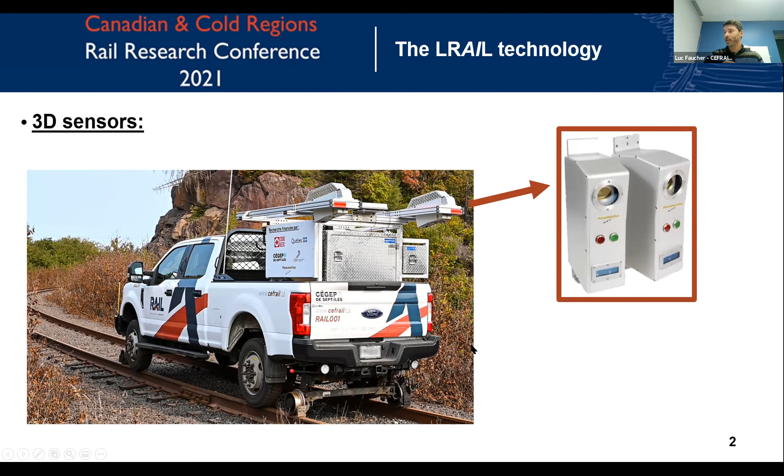They have sold this system in over 40 countries, so the big question was, can we also inspect the track with that system? So this is the system that we do own here at the college. It's mounted on a hi-rail pickup truck, but the system can also be on a car. And it is mounted here at the back with these sensors that will do 3D mapping of the track that is under it.

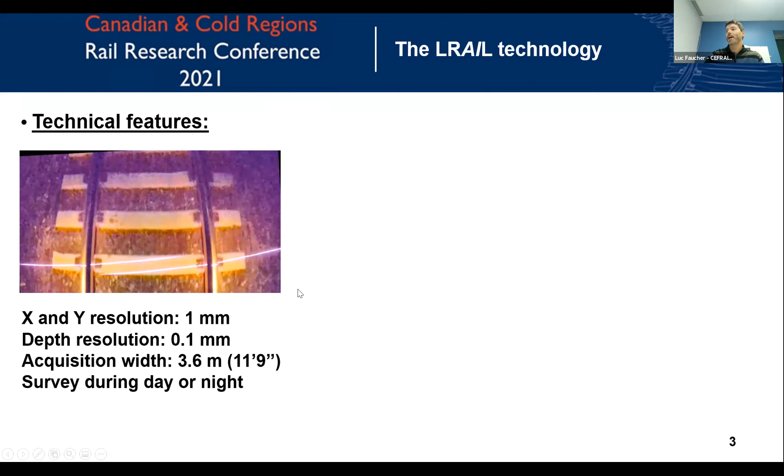So some technical features of the system: you can see here the laser lines that are sent on the ground. And you will collect this laser line with a spatial resolution of 1 millimeter and a depth resolution of 0.1 millimeter. The acquisition width is quite wide since the cameras are high. It's 3.6 meters wide, and you can do your survey during day or night. And in the end, you will get these 3D images that are here. But we mostly work with these top images in 2D, which can be represented in two different modes, which is the intensity mode and the range mode.

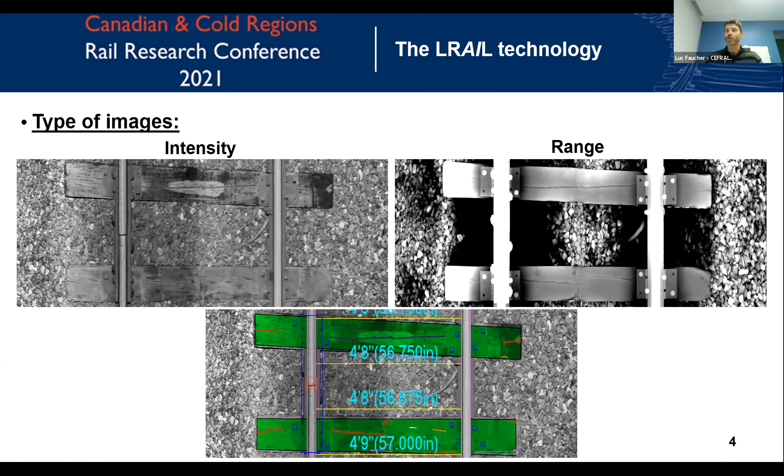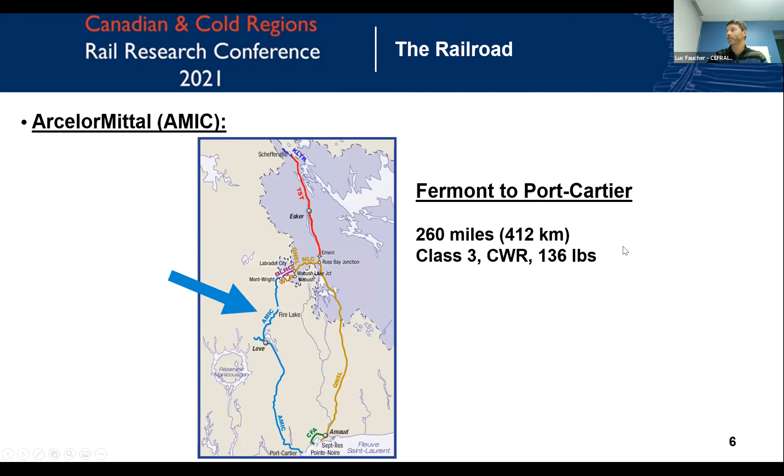It is a class 3 railroad with continuously welded rail, and it is a 136-pound grade of rail. So as I mentioned, it's mainly used to carry the iron ore from the mine at the north to the south. Every year, it's about 26 million tons of iron ore that are carried on this railroad.

And the north part here, because there are two mines, has a higher density of traffic because there is 16 million tons of run-of-mine ore that is carried at the north. So the north section is quite used during the year. It's 80 MGT per year.

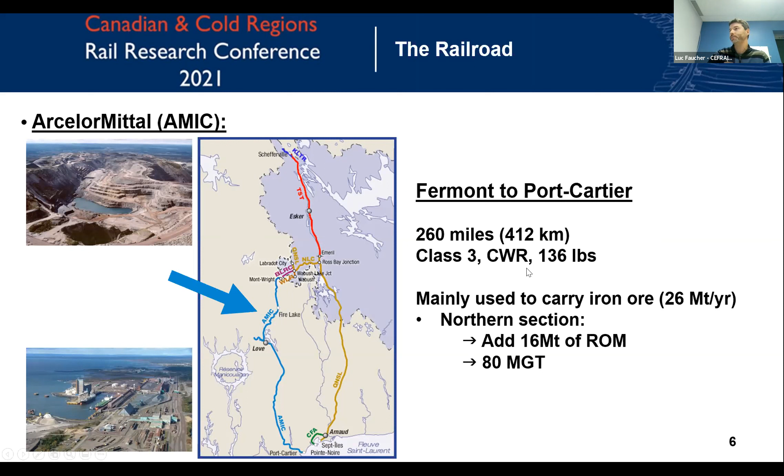So the study that we ran with the system was to assess the angle bars. The company used standard angle bars 36 inches long, fixed with 6 bolts if the joints are permanent, or only with 4 bolts if they want to weld it before winter. So we did our survey for this study during the month of July, where both types are present. And we did the inspection at inspection speed, which is 25 miles per hour.

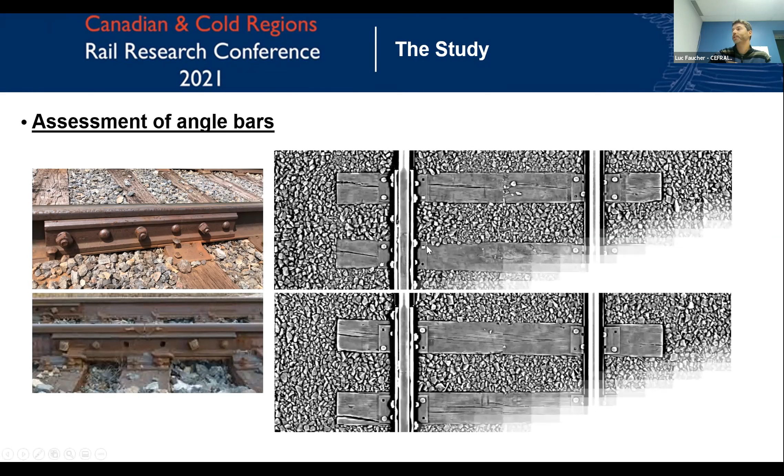And we took a survey of all the 260 miles, which in the end gives us images like these. We have 412,000 images because each section represents 1 meter. So when you go on a 260-mile-long railroad, you kind of have 412,000 images in the end.

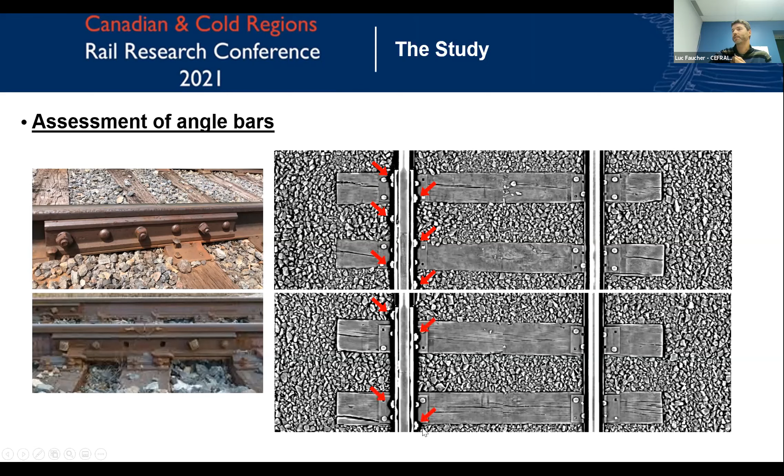And as you can see here, we can really see the angle bars and also the nuts with the bolts that are there. So for an angle bar that has 6 bolts, you can count them here. So 1, 2, 3, 4, 5, and 6. And if there are only 4 bolts, it's the same. It's quite easy to take a look at it.

So the 2 main questions during the study were: is the system capable of detecting all angle bars? And also, was the system capable of counting the right number of bolts at these angle bars? To do that, we made our own software to extract and visualize the data. And let me tell you that, because of the high definition, it's about 2.5 terabytes of data that we have to process at the end of the survey.

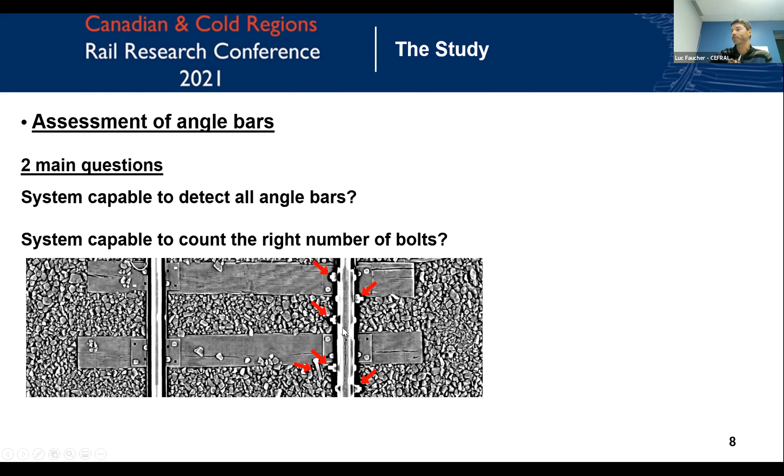So, of course, we need some help, which is AI in this case, with the deep convolutional neural network that is used. And it's quite important to assess the angle bars, since sometimes some nuts can break. As you can see here, of the 6 bolts that were there before, there's one that is missing right here. And you can see that this bolt is just next to the angle bar there. So if we have a system that is able to detect the angle bars, count the number of bolts, and also at some point the opening of the gap here, it would be great.

So to be sure that the system was capable of assessing the angle bars, we looked at 4 different key performance indicators. The first one is precision. Precision is: of all those deemed positive by the DCNN, which percentage is truly positive. So it means that when you get an image and it says there's an angle bar there, sometimes it will really have an angle bar, which is a true positive, but sometimes there won't be any angle bar, so that will be a false positive. So of all those deemed positive, what percentage is truly positive?

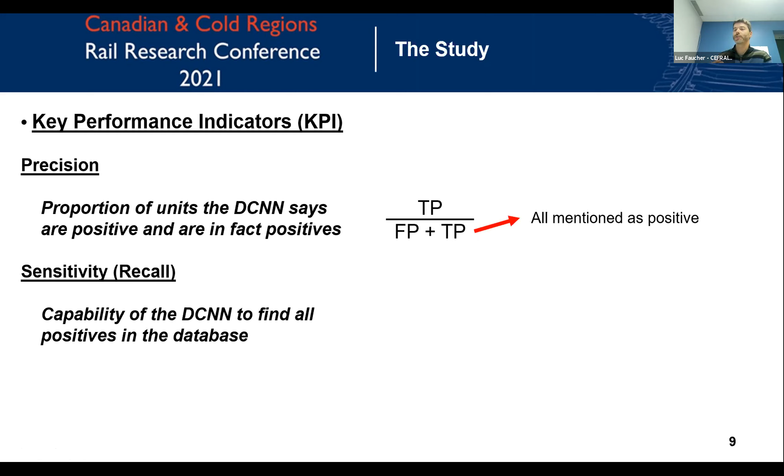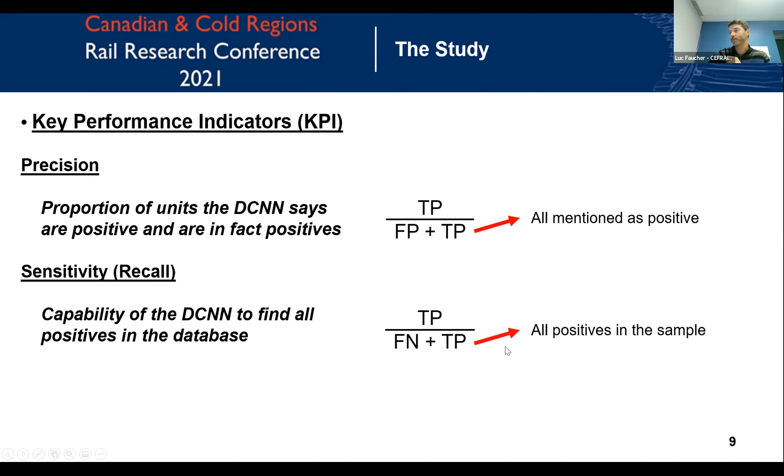We also looked at the sensitivity, or recall, which is the capability of the DCNN to find all positives in the database. To do that, you have the true positives, which are the real positives, and also false negatives, which should have been positive. So what is the proportion of true positives that we have regarding all the positives in the sample?

So the third parameter here is the specificity. Specificity is to know, of all that should be true negative, which percentage was deemed negative by the DCNN. So it's the same as we just saw before, but this time for the negatives.

So at the same time, of all the negatives in the sample, what is the proportion that are true negatives? And the fourth key parameter here is the accuracy. So the ratio of correctly labeled subjects to the whole pool of subjects. So of all that says that were positive or negative and that in fact were true, what is the proportion over the whole pool of subjects?

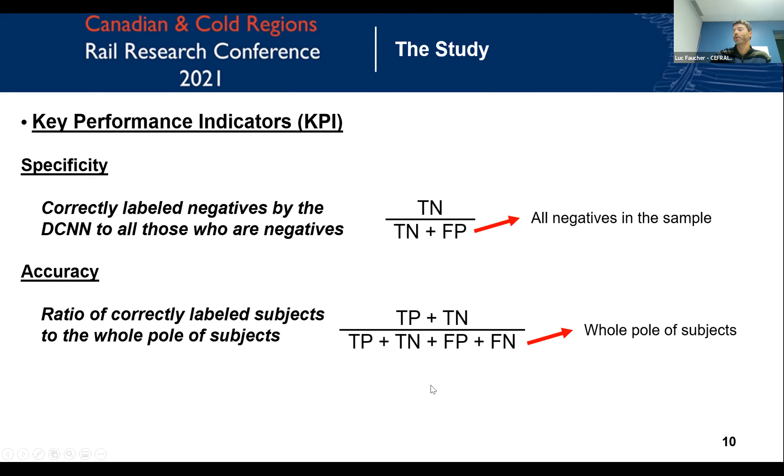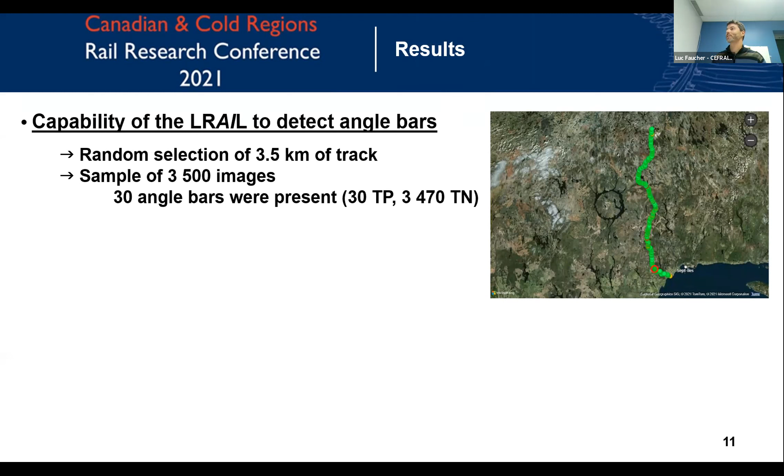So the first thing we took a look at was to know if the system was able to detect all the angle bars. So what you can see here in the green circles are all the angle bars that we found on the track with the system. And to restrain, I would say, our research, we randomly selected 3.5 kilometers of track, which turns out to be a sample of 3,500 images.

So if I zoom in, this is the section that was assessed. And it turned out that in that section, there were 30 angle bars that were present. So in the end, what we expect from the system is to have 30 positive images and 3,470 true negatives.

So here's the confusion matrix that we did after the study. So what you have here are the predicted values by the DCNN, and here are the real values. So what you can see here, for example, you have 29 positive values that were predicted by the system that are in fact positive, but there's one that was negative, but was mentioned as positive by the system.

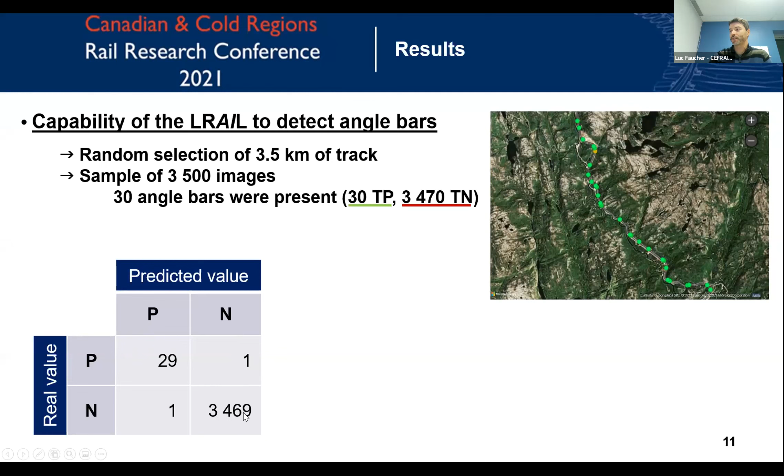And when you take a look here, you will see what the system says are negative. So there is one that was in fact positive, but the 3,469 others were really negative. So this is how now we can calculate the 4 parameters. So the precision here, as I said, is of all the ones that are mentioned positive, what is the percentage that is really a positive one? So that will be 29/30. So the precision here is 96.7%.

When you take a look at the sensitivity, so of all that are really positive, what is the number that the system says are really positive? So that would be 29/30. So the same percentage here for the sensitivity. And after that, we took a look at the specificity. So this is the same, but for the negatives. So as you have 3,469 that are real over 3,470, when you round up, you have a 100% result.

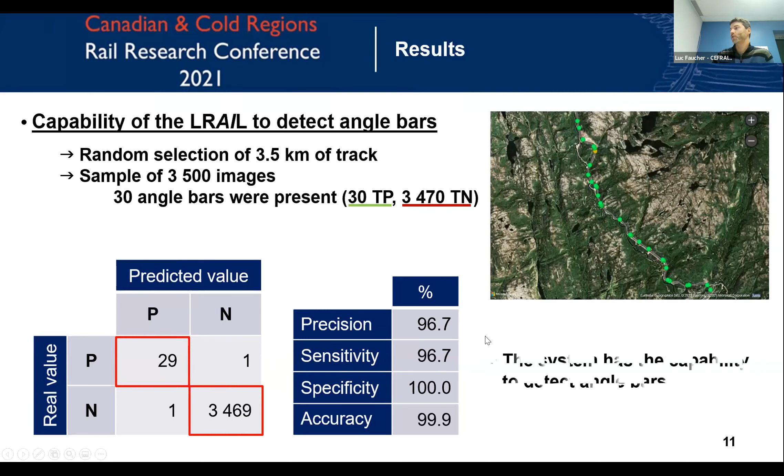And for the accuracy, which is the number that are really well defined by the system, which is almost all of the data here, you have an accuracy of 99.9%. So what we can see is that, yes, the system has the capability to detect angle bars. So now, is the system able to count the right number of bolts?

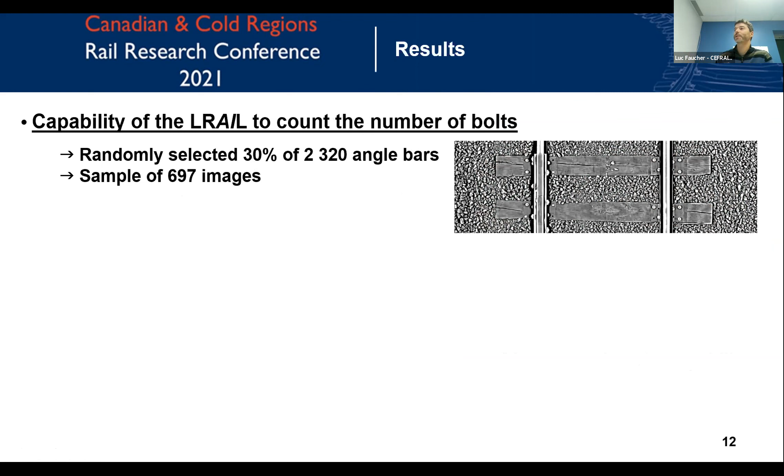So what we did this time is that we randomly selected 30% of all the angle bars. So on the track, there were 2,320 angle bars. So 30% of that makes a sample of close to 700 images. So this time, the confusion matrix is for multi-class classification. I won't go as deep as the previous part, but what is important to see here is that what you have in green are the number of bolts that were right. So there were a few of them that were wrong, but in the end, the system has good performance indicators.

The precision is quite high, over 97%, as is the sensitivity. And the specificity is close to 92% and the accuracy to 98%. So what makes the specificity a little bit lower is that, in fact, there were some angle bars that were identified that were real angle bars, but they were not on the main line. They were in the siding, in the switch.

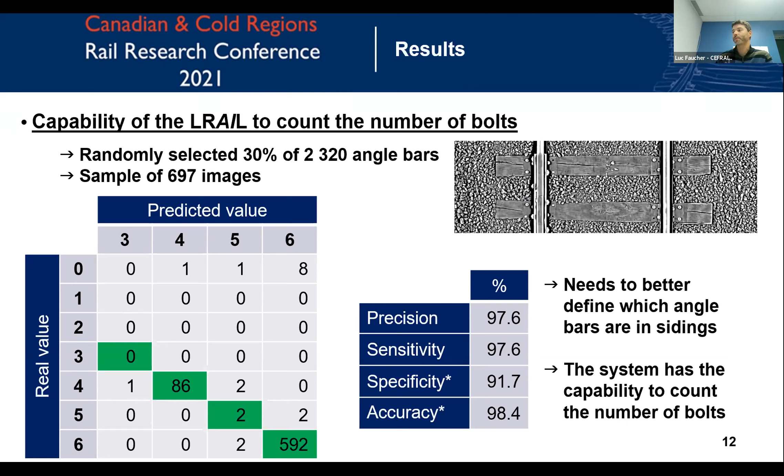So the system wasn't able to recognize that these angle bars were in the siding and not in the main line. So we need to better define which angle bars are in the siding, and this number will, of course, increase. So in the end, the conclusion is that the system has the capability to count the number of bolts.

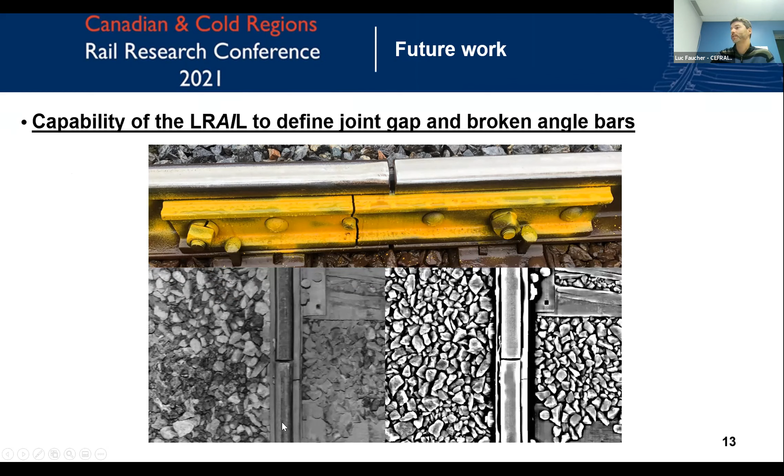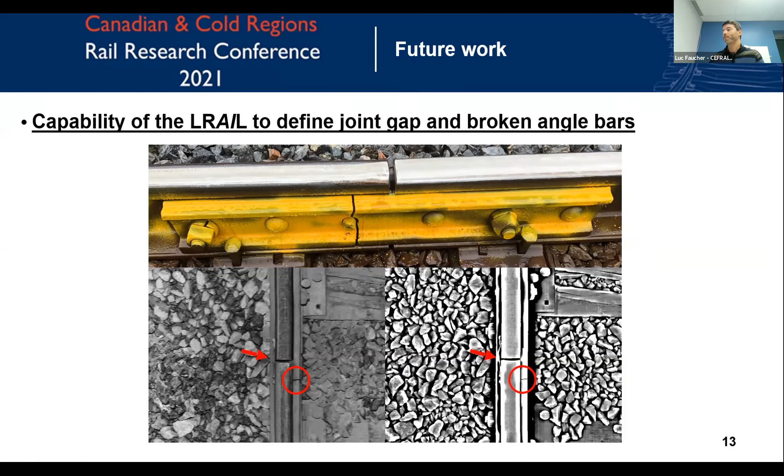So what is to take a look at in the future? You can see also two other parameters that are really important at angle bars, which is the joint gap here, and also if the angle bar is broken. So when we take a look at this angle bar with the system, before it was highlighted in yellow, you can see here on the cameras that these angle bars are broken. And also we can see here the joint gap. So the system already gives information about the joint gap, but we need to confirm that this information is right in the end.

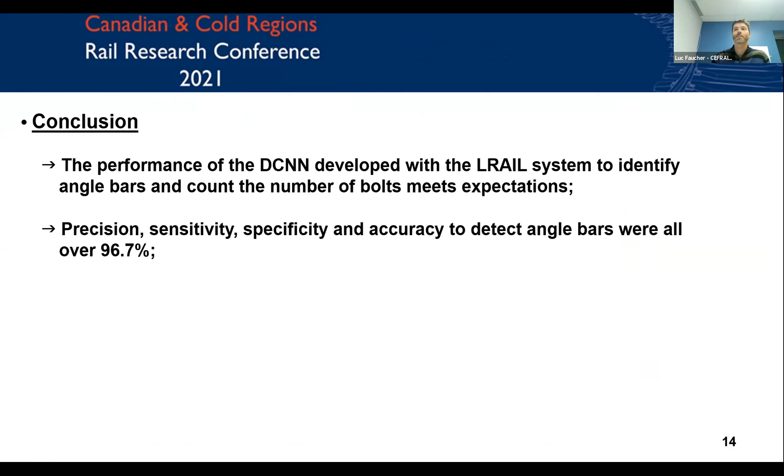So as a conclusion, what I can say here is that the performance of the DCNN developed with the LRAIL system to identify angle bars and count the number of bolts meets expectations. Also, the precision, the sensitivity, specificity, and accuracy to detect the angle bars were all over 96.7%. And many false positives came from real angle bars, but were detected on the wrong path in switches. So a better recognition would be better for the next step to go on.